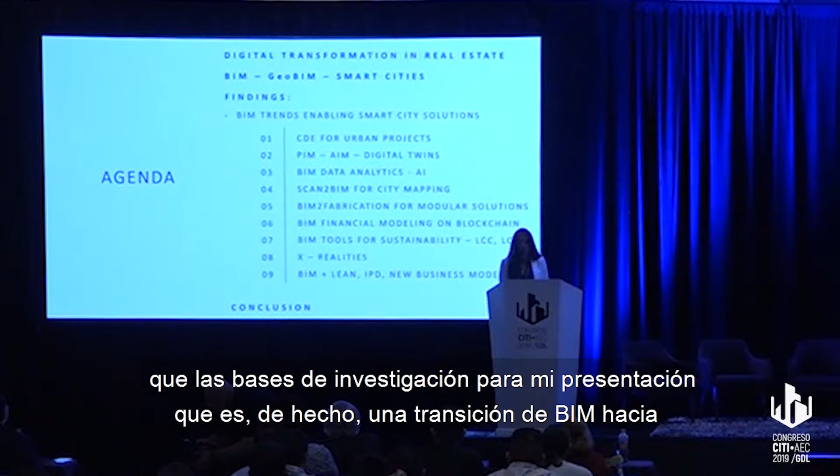After a brief overview of the European and Swiss digital transformation, I will set the research foundations for my presentation, which is the BIM transition to the urban scale through advances in GeoBIM. This is basically the link which connects BIM with GeoBIM towards smart cities. The core of the presentation will be the emerging BIM tools which can extend the use of BIM in an urban context for the development of smart city solutions, from digital twins to blockchain or extended realities.

First, let's look a bit at the digital transformation in real estate, and I'll be glad to tell you how it is now in Switzerland.

The real estate industry is massive in Switzerland, and I'm sure here as well. It accounts for 3,000 billion in the current value of the building stock. However, we work in a very conservative industry, which is actually in last place when it comes to adopting new technologies.

There is a need to innovate to overcome a lot of challenges. It's not that everything is perfect, because there are a lot of inaccurate valuations, cost overruns, and a lack of transparency in many countries, even in a perfect system like Switzerland. There is a need to innovate to overcome these challenges.

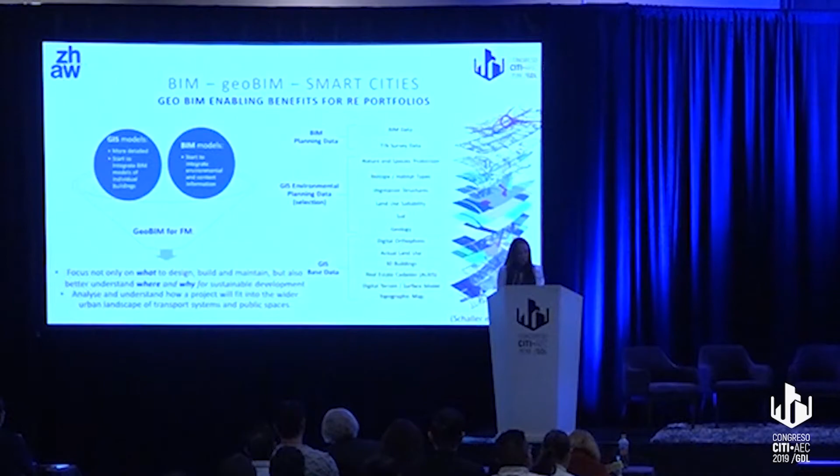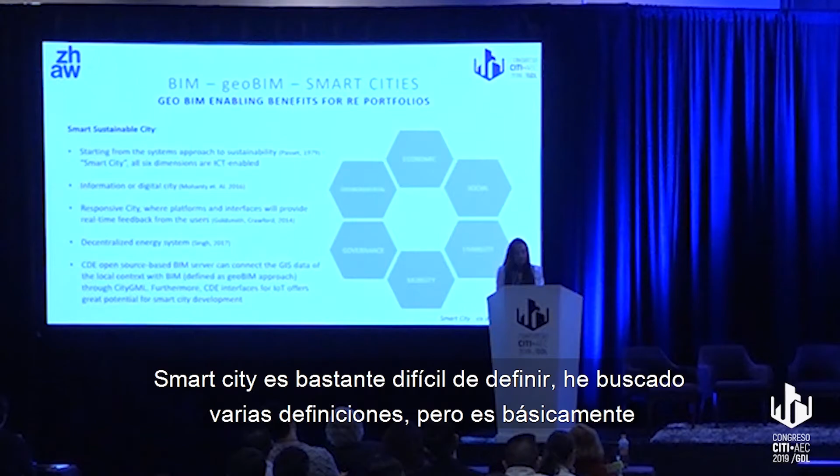Smart city is actually hard to define. I've been looking for several definitions, but it's basically an evolution. Some call it Tel City, Information City, Digital City. But when we consider smart cities, we also take into account sustainability, starting from the first three pillars: economic, social, and environmental. With BIM we can make the transition to more responsive neighborhoods by integrating mobility and environment.

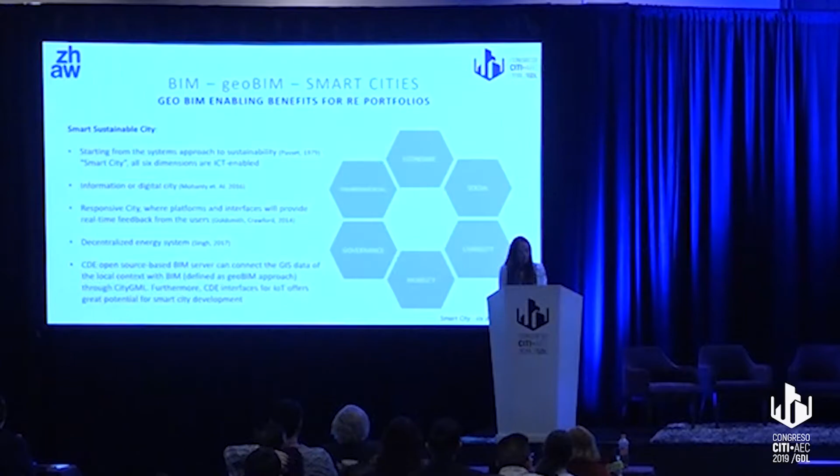Next, I would like to introduce some trends which, in combination with BIM, have potential to really make a difference and capture more value if applied on cities.

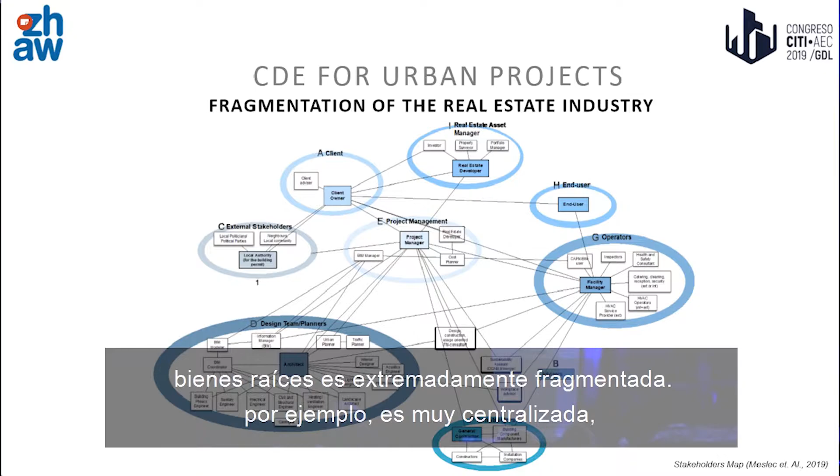First, the common data environment. We have already seen in previous presentations what the future developments are. However, I would like to take a step back and point out that the real estate industry is extremely fragmented. In finance, for example, it's very centralized - we have only a global exchange, a ledger. But in the real estate industry, everyone is working as an expert in their own field. So this is really a challenge.

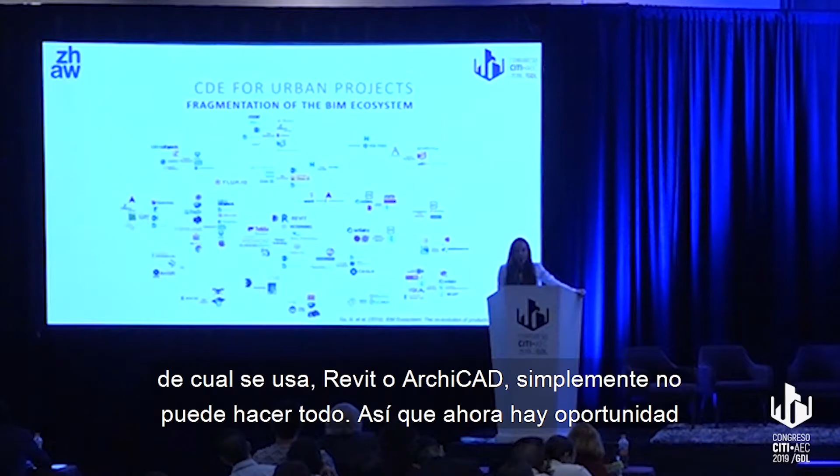As a consequence, there is a very broad offer of BIM solutions. BIM is truly an ecosystem, and there is no single software that can do everything. Regardless of whether we use Revit or Archicad, it simply can't do everything. So there is now a market opportunity to develop integration, especially to connect it with GeoBIM. Here you can see a possible solution.

The common data environment, as defined in the current ISO standards, is actually an open source-based BIM server which can bring together all the different sets of information from different stakeholders. As an industry, we can take benefit from this and avoid miscommunication problems which lead to cost overruns and so forth. It's actually a single source of truth, which collects and manages the alphanumerical data and documents of a project.

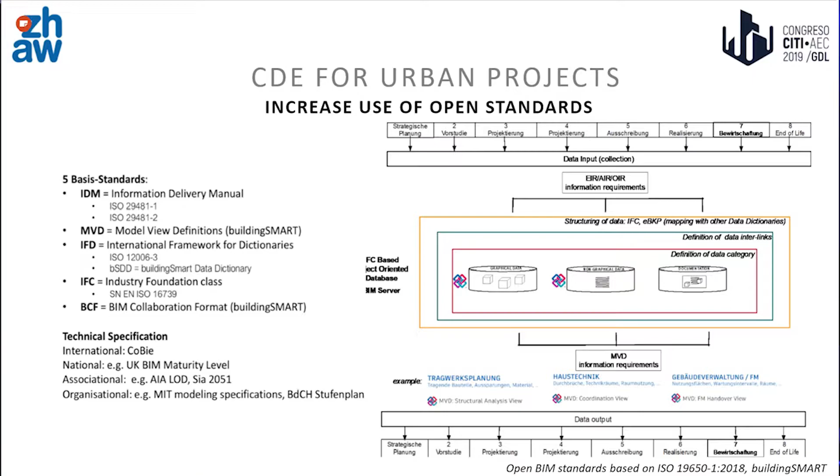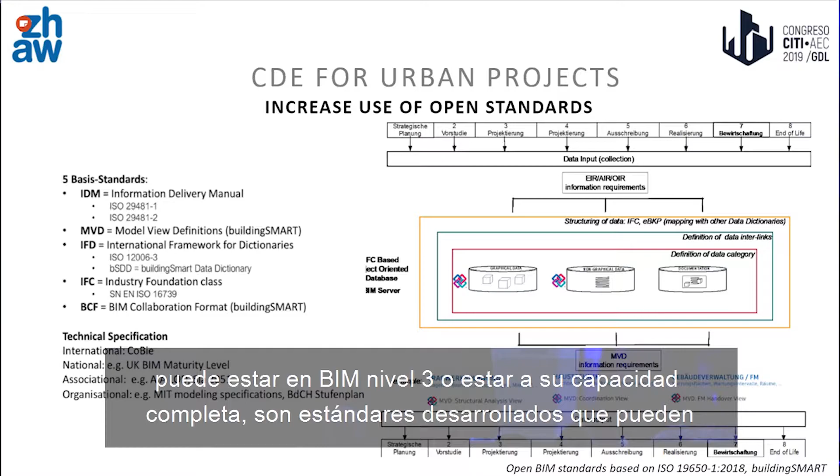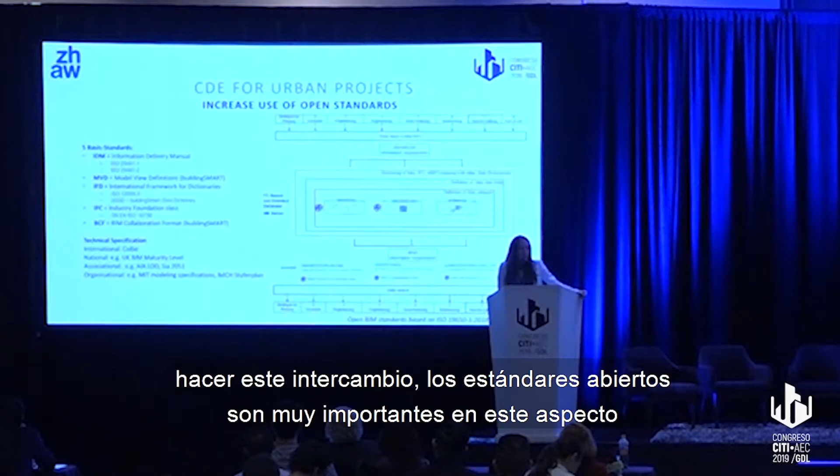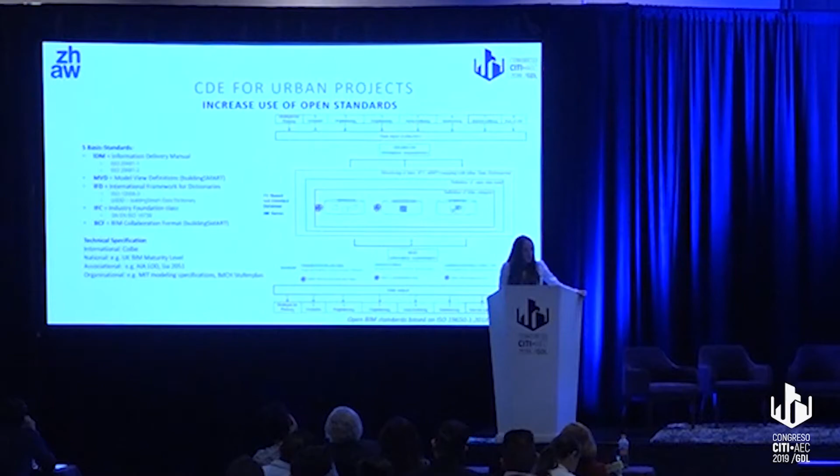In the future, it can be used at its full capacity in level 3 BIM if standards are developed which enable this exchange. So open standards are very important in this respect - not only IFC, but also model view definitions and IFD and so forth.

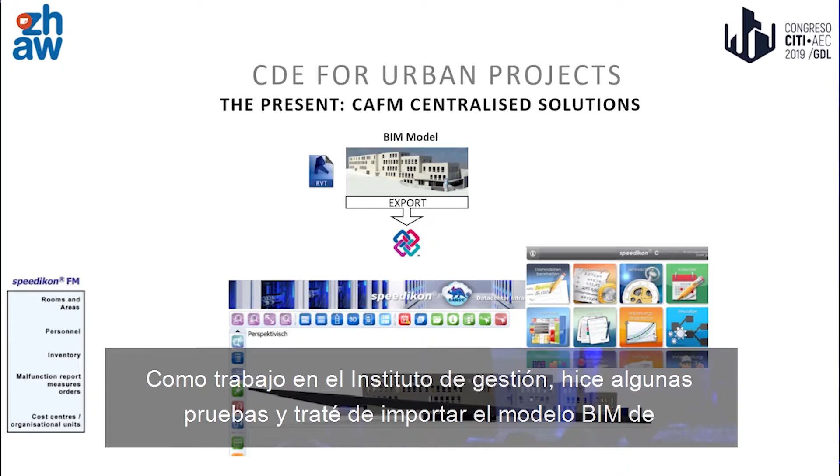Because I'm working at the Institute of Facility Management, I did some tests, and I tried to import the BIM model of our university, which had been created in Revit, into a CAFM software. It was very limiting how I could use it.

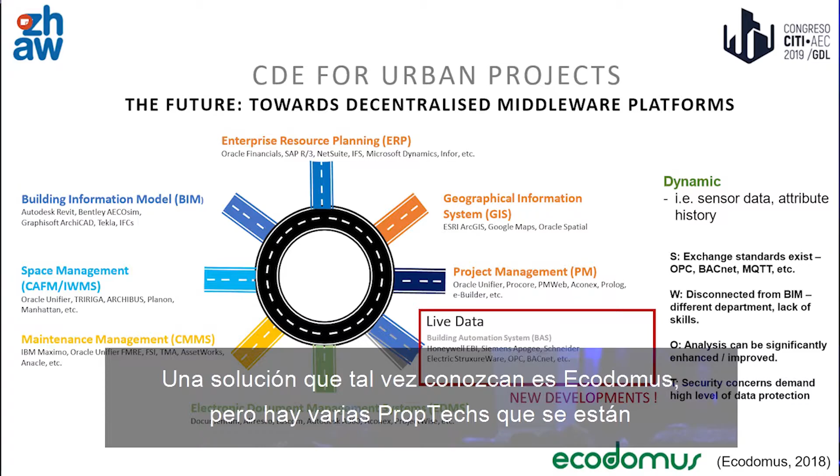But I believe that in the future the model could be on a more decentralized platform, the so-called middleware platforms, which can pull data from different sources. One solution you might know is Ecodomus, but there are several PropTechs developing this. What's new is integrating now IoT data, so live streams of data can also become reality.

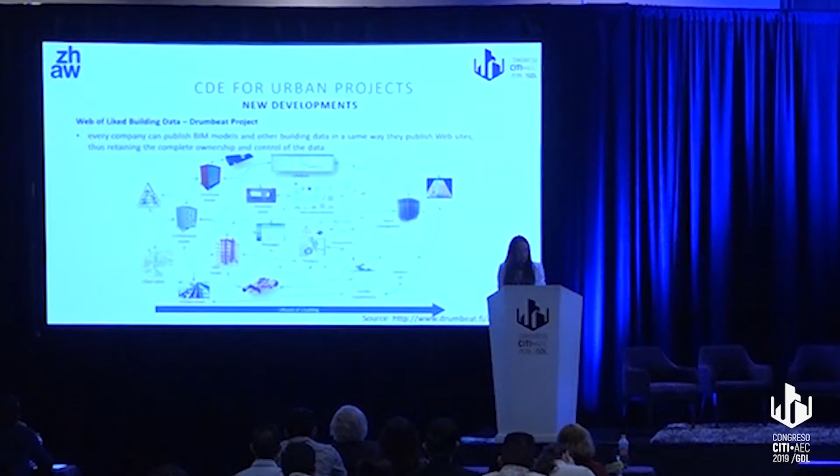And sure, there are more solutions like the web of linked building data, which we have seen in previous presentations, like the Internet of Data, also based on this decentralized concept.

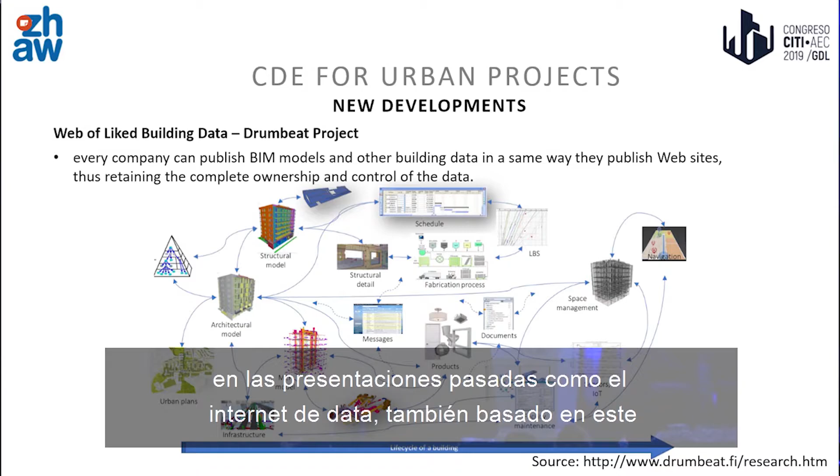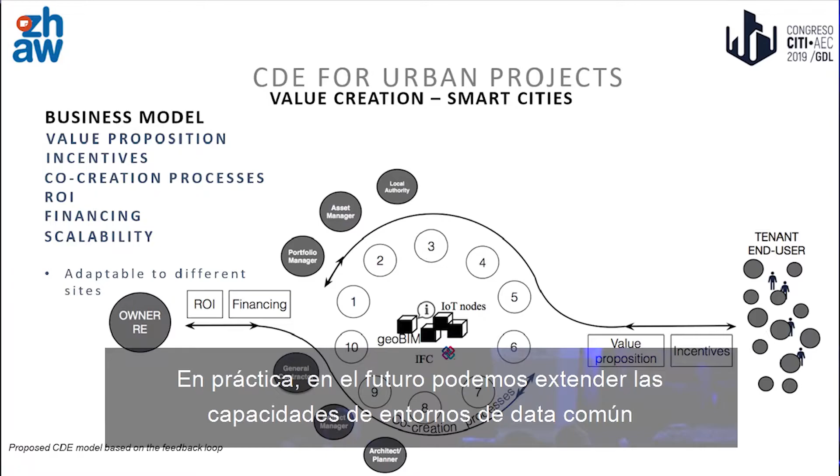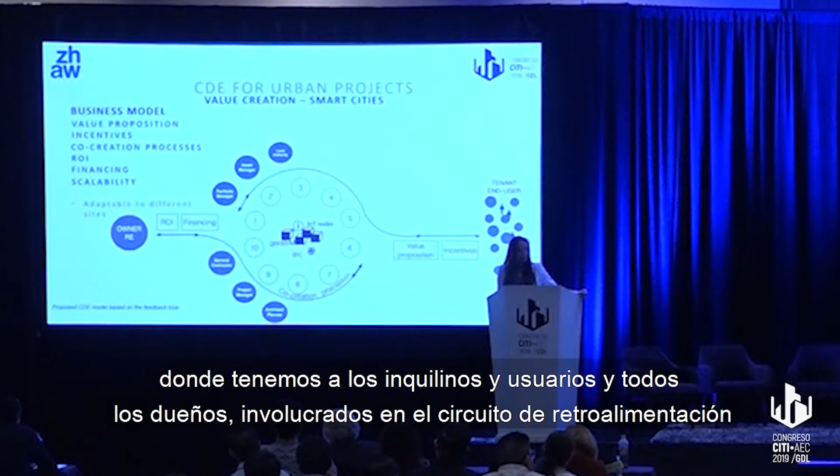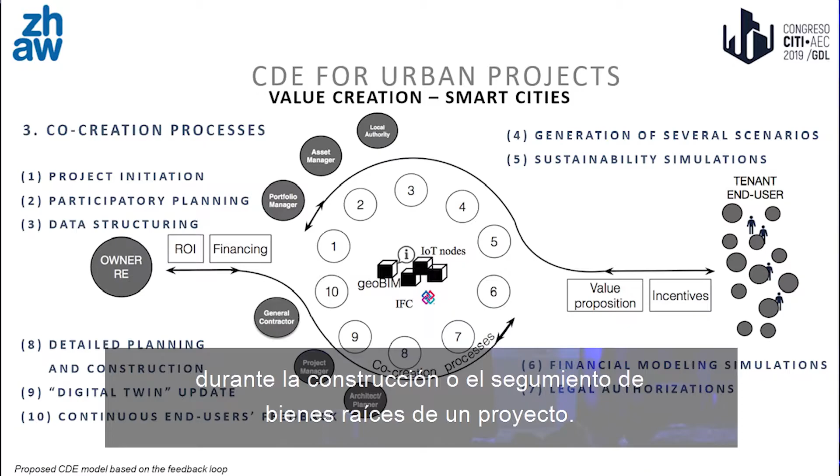In practice, in the future we can extend these capabilities of common data environments to an urban neighborhood. You can see here a model which I've developed this year, where we can have the tenants, users and owners involved in a feedback loop, all connected via a common data environment, which would also enable some co-creation processes during the construction or real estate development of a project.

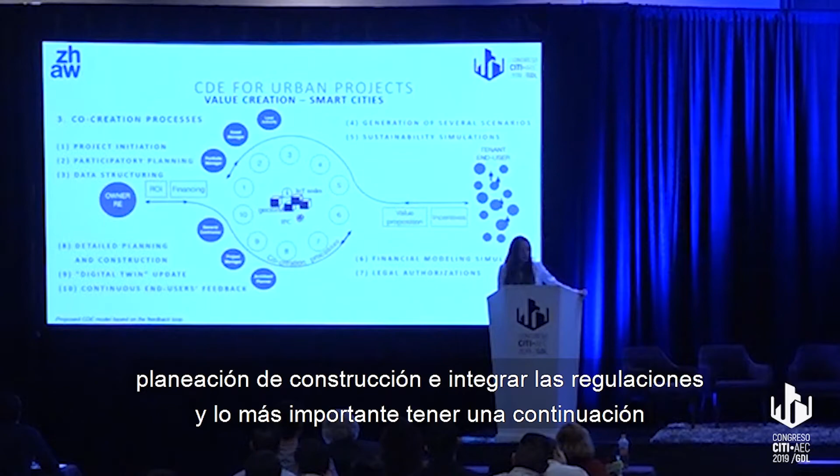The advantages are huge because we can generate several scenarios and receive immediate feedback from tenants and all stakeholders involved. We can also have detailed planning of construction and integrate the laws and regulations, and most importantly, have a continuous end-user feedback loop.

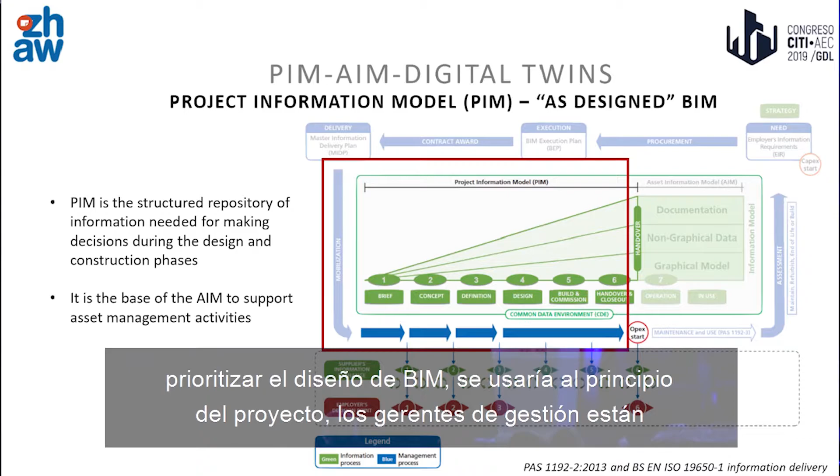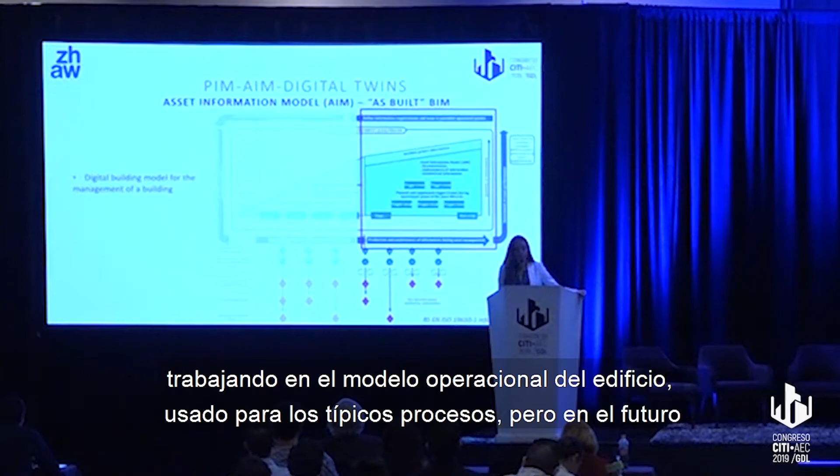Also, it's now possible to have this transition from project information models to asset information models and further on to digital twins. I'll go quickly because you might already know the standards. The project information model we would call design BIM, used at the beginning of a project. Further, the facility managers work on building up the operational model of the building, used for the typical FM processes.

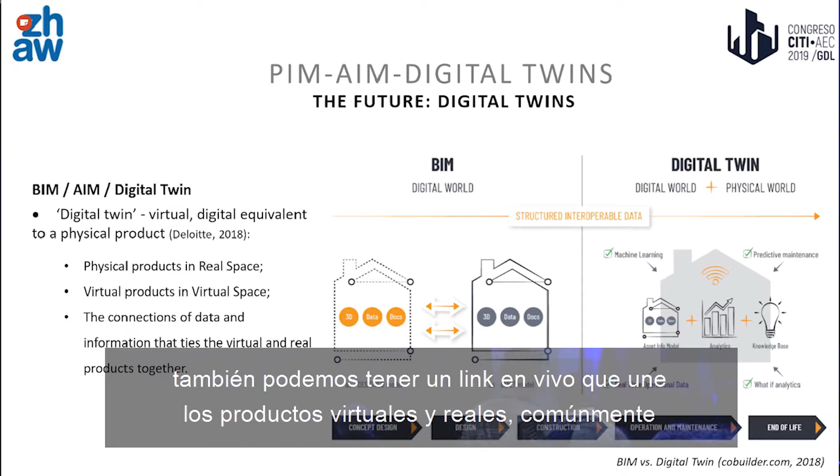But in the future, we could also have a live link which ties the virtual and the real products together, commonly known now as digital twins. Some examples are already on the market developed by Autodesk, like the project Dasher here, where different sensors can be visualized live.

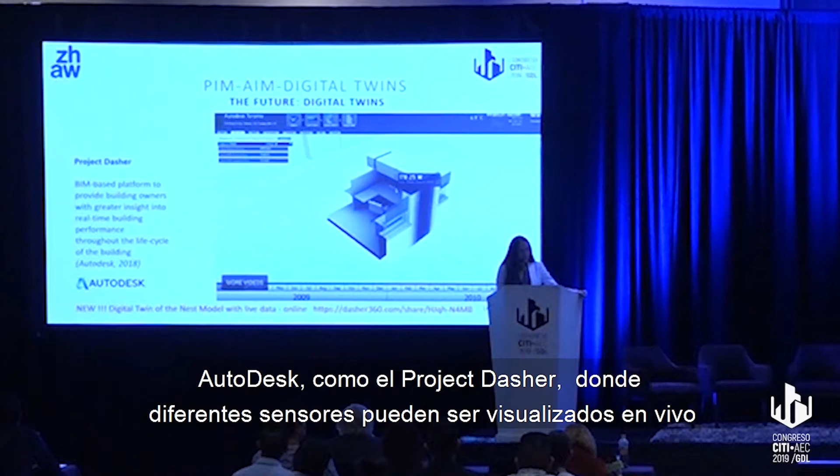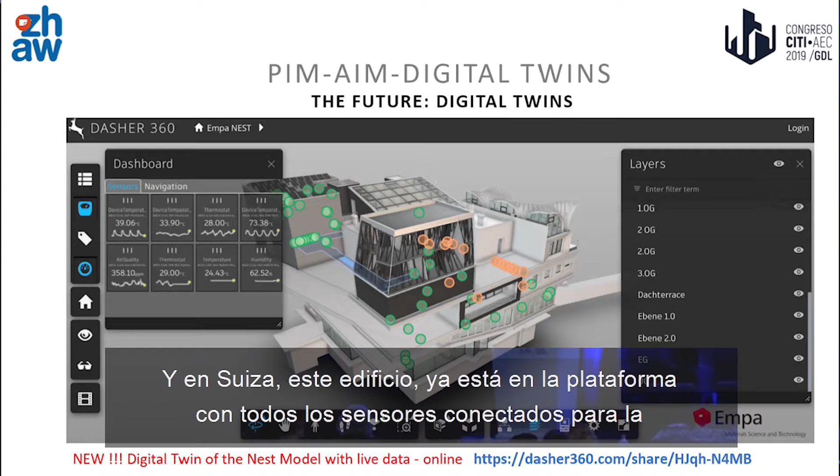In Switzerland, the NEST building is now on this platform with all the sensors connected, only in the web browsers. We can have a look at the live data.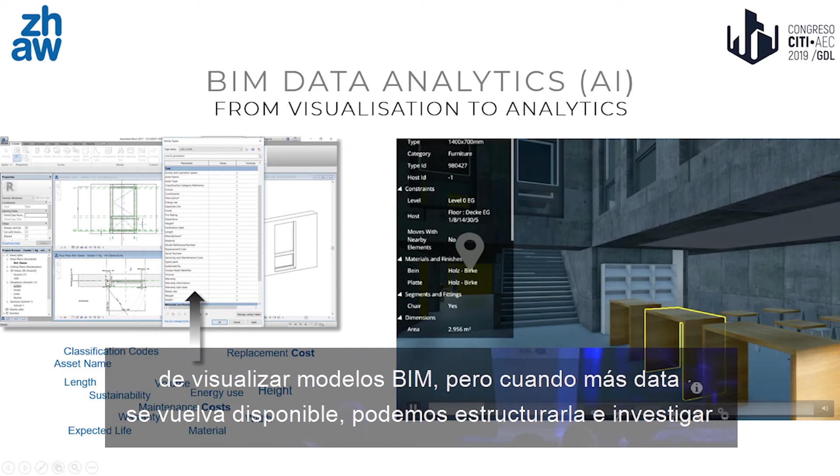There's a lot of potential when it comes to data analytics and artificial intelligence. So far we would only be able to visualize BIM models, but when more data becomes available we can structure it and investigate how we can create information and knowledge. Here is a model developed by Bilal Succar, based on the ancient DIKW model: data, information, knowledge, understanding, and wisdom. So the question is how can we use this data in a good way so we can really make value out of it?

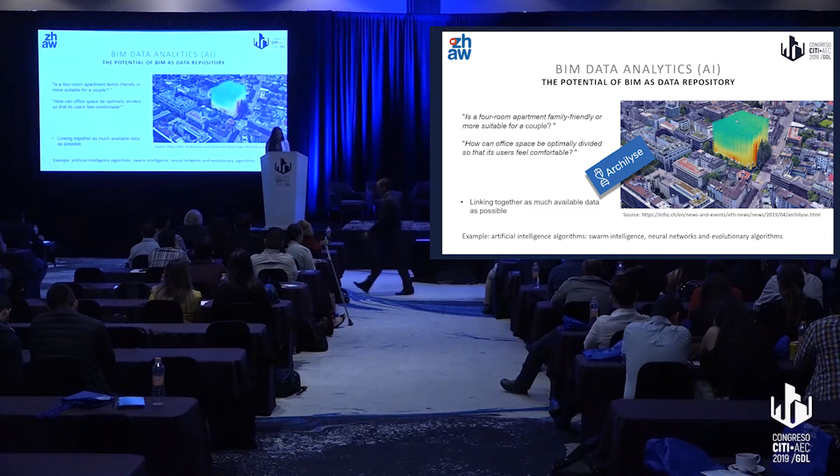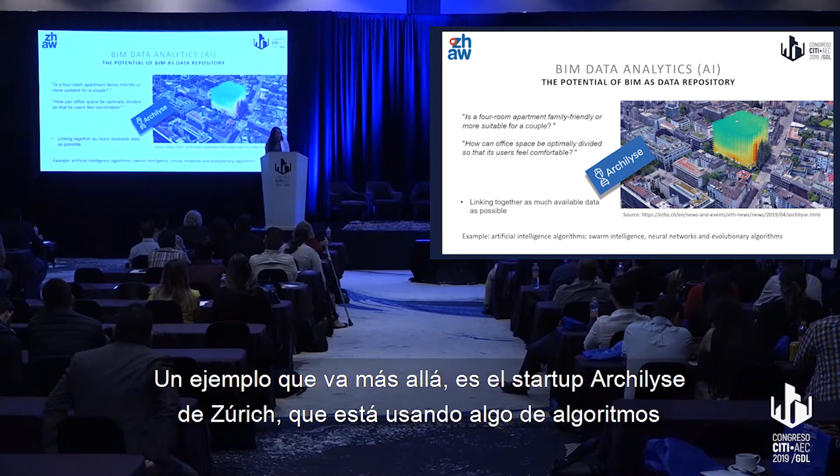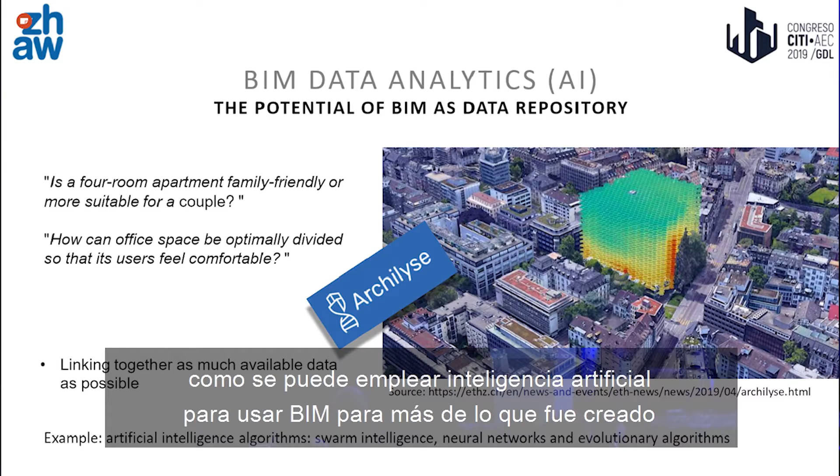One example which goes further is Archilyse, a startup from Zurich, which is using artificial intelligence algorithms. They go a step further from predictive maintenance, looking at how we can use AI to really use BIM for more than it was done traditionally.

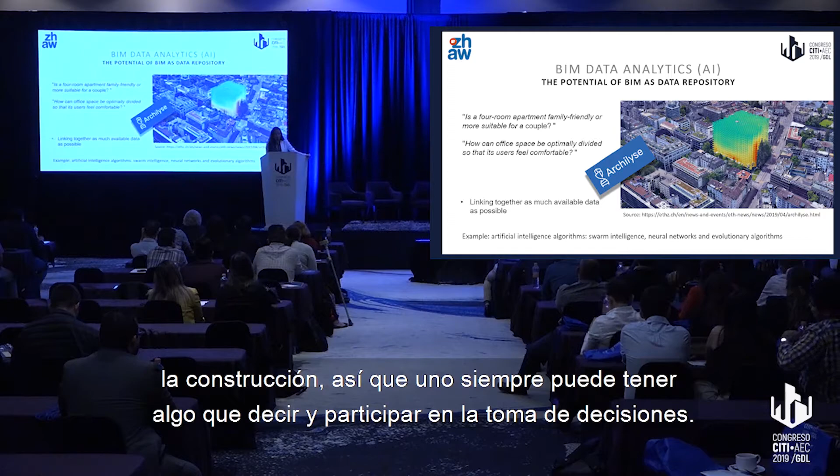So we could answer questions like how an office space can be optimally divided so users feel comfortable, and so forth. Obviously an architect would know the answer for this, but these tools are important also to democratize BIM and the construction industry, so that everyone could have a word to say and participate in decision making.

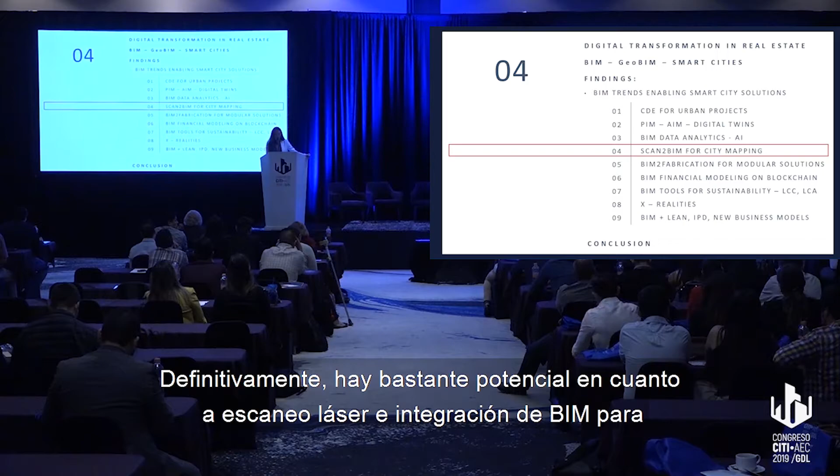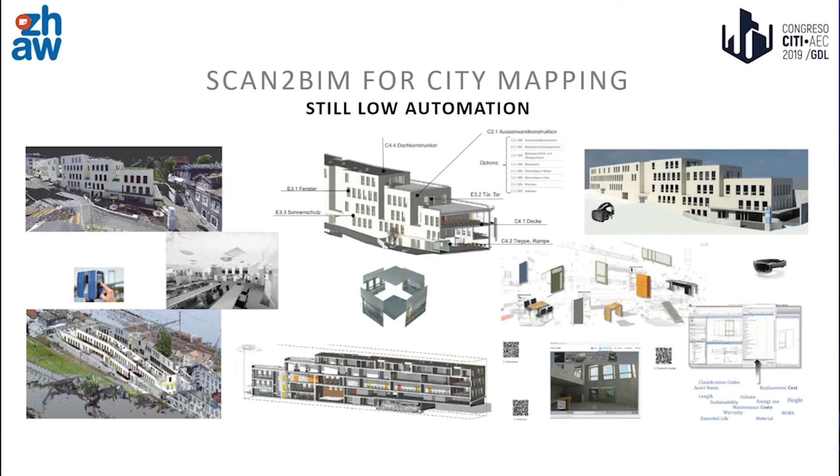There is definitely a lot of potential when it comes to laser scanning and integrating with BIM, especially for city mapping. In this use case I've been working on, I've seen that the process is manual. Even though scan-to-BIM can really increase efficiency over the life cycle, because we capture reality and have live and more accurate data, currently it's difficult to create automatic BIM models, 3D geometry from point clouds.

There was a video, sorry, I see that the videos don't work, but it's fine, we can skip it.

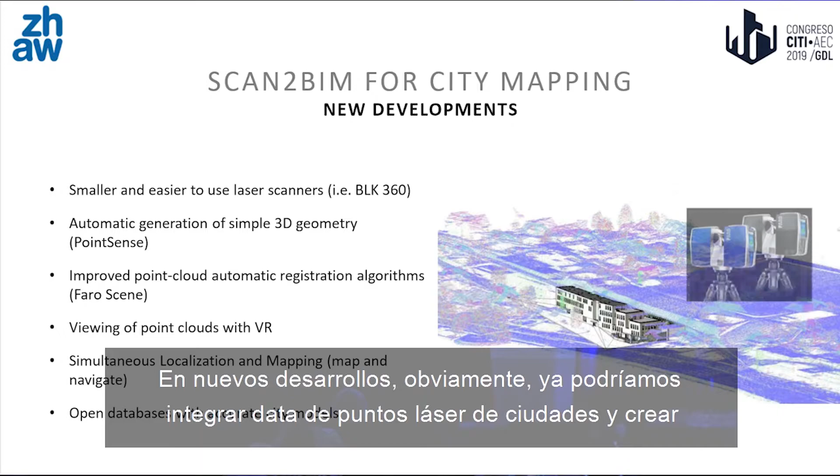New developments mean we could already integrate laser point data of cities and create very accurate open databases with city models, which could actually help us a lot.

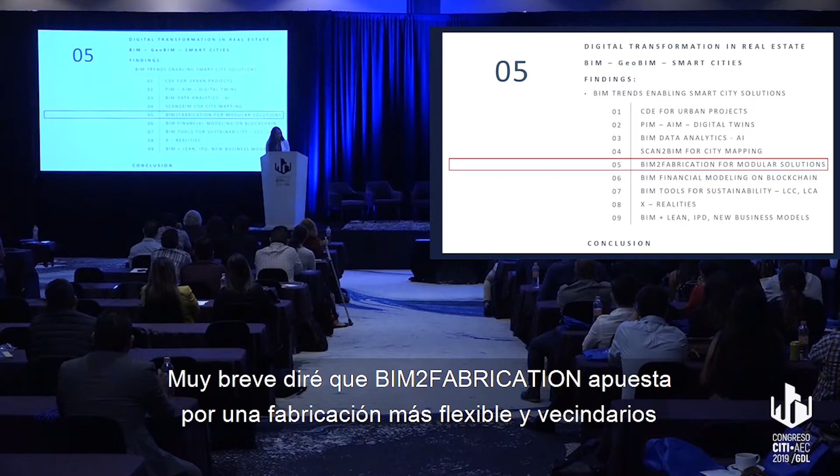Very briefly, I would say that BIM to fabrication for more flexible and modular neighborhoods has definitely potential. This was again a small video, but with a lot of BIM objects from the use cases I've developed. In the future we could use it for fabrication.

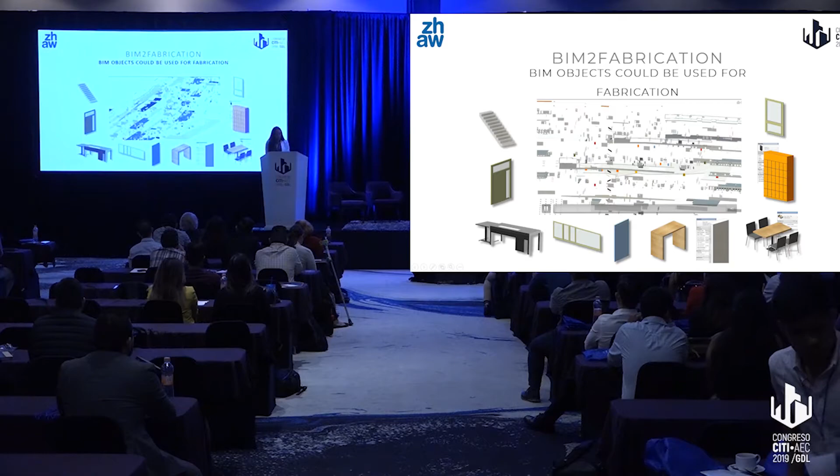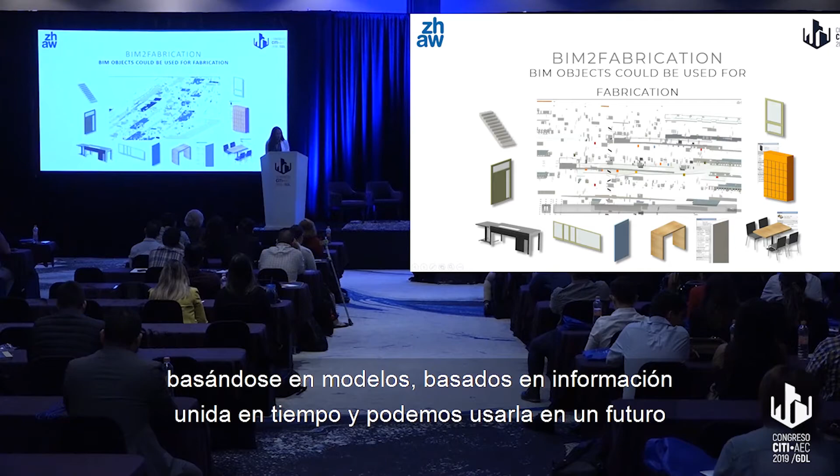So the BIM objects are actually intelligent because they can automatically rebuild themselves based on models and information attached to them. In the future we could use this to create more flexible apartment buildings, which could change together with market demand.

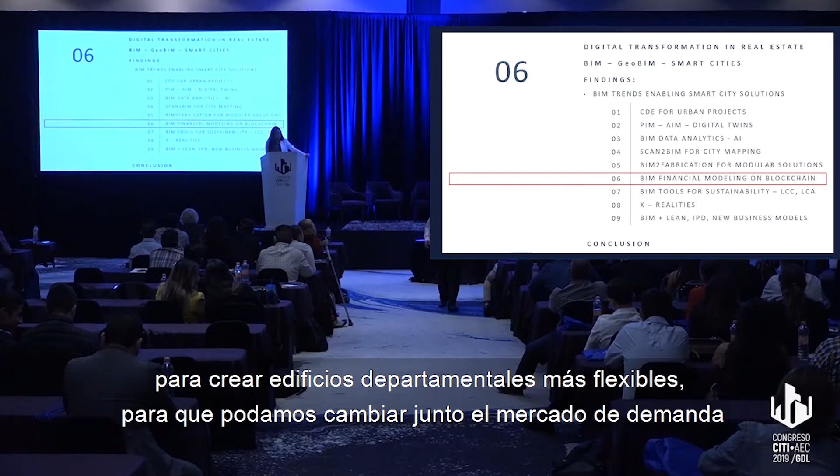At least in Switzerland, blockchain is quite a hype because it is the country with the most favorable regulations for blockchain. In relation to BIM, it can really help with the challenge of trust, because a lot of financial data is not stored in BIM due to trust issues.

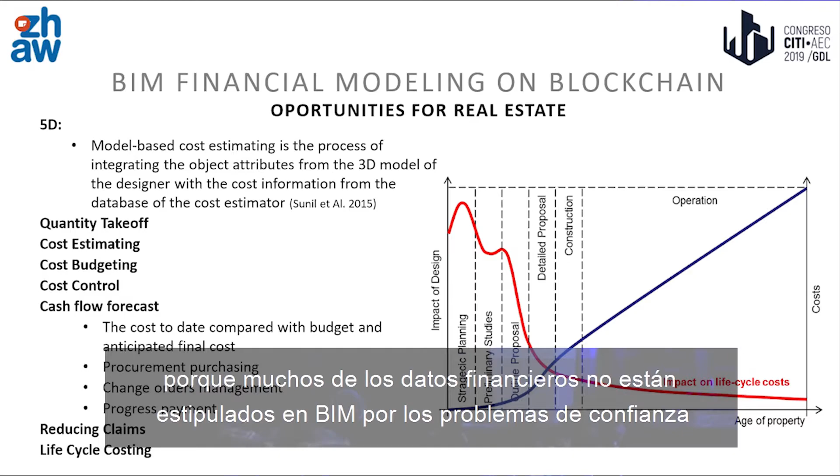If this data is standardized and put on a blockchain, then we can do a lot more. Plus there will not be an intermediary, so the middleman disappears, and transactions would be much faster.

Smart contracts are used quite a lot in facility management, for example. Through these contracts we can basically speed up the payment process, and by connecting them with the property DNA of buildings, use them in transactions and also during operations, delivering more innovative energy efficiency data services.

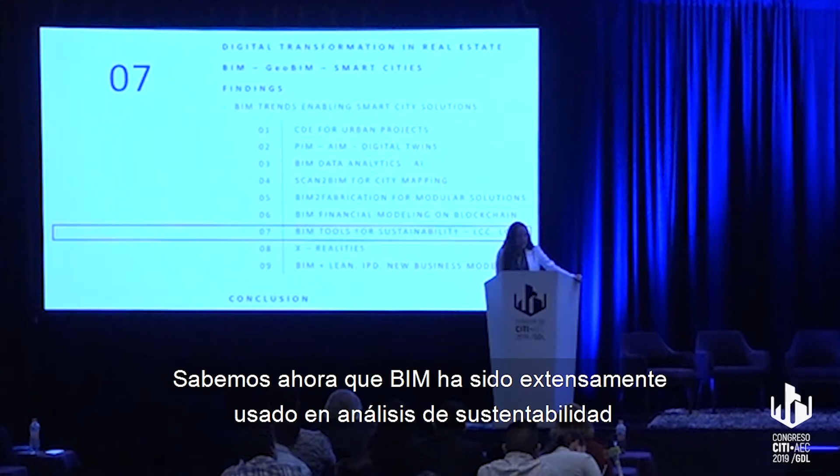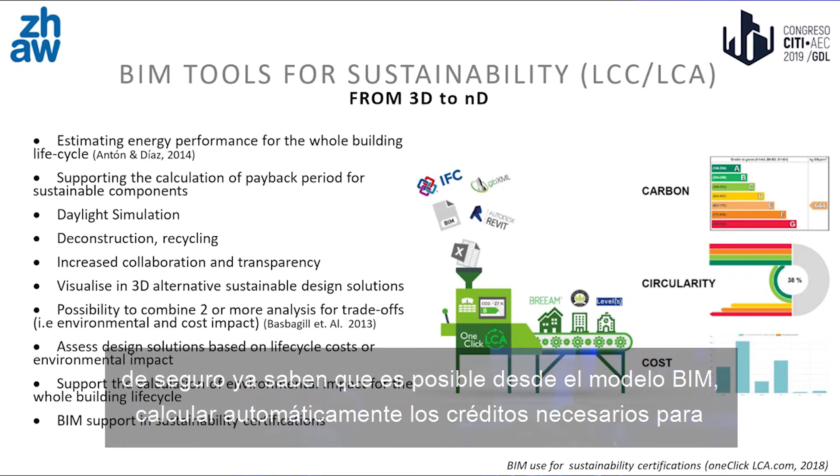We know already that BIM has been extensively used in sustainability analysis. You might know already that it's possible to automatically calculate from the BIM model the credits required for different sustainability certifications, and we can also assess design options based on life cycle costs and so forth.

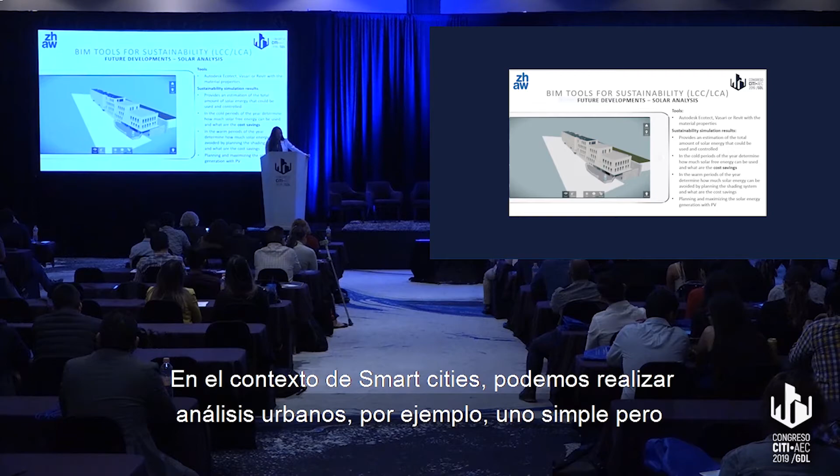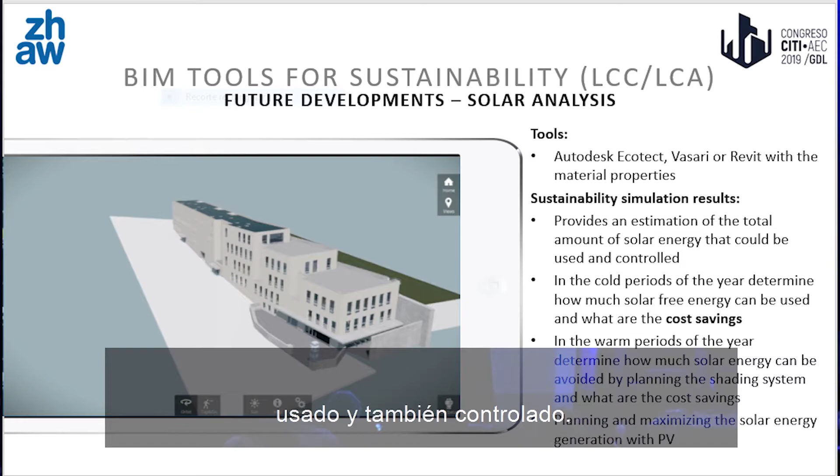In the context of smart cities, we can perform more urban analysis, like, for example, a very simple but very useful solar analysis, where we could provide an estimation of the total amount of solar energy that could be used and also controlled.

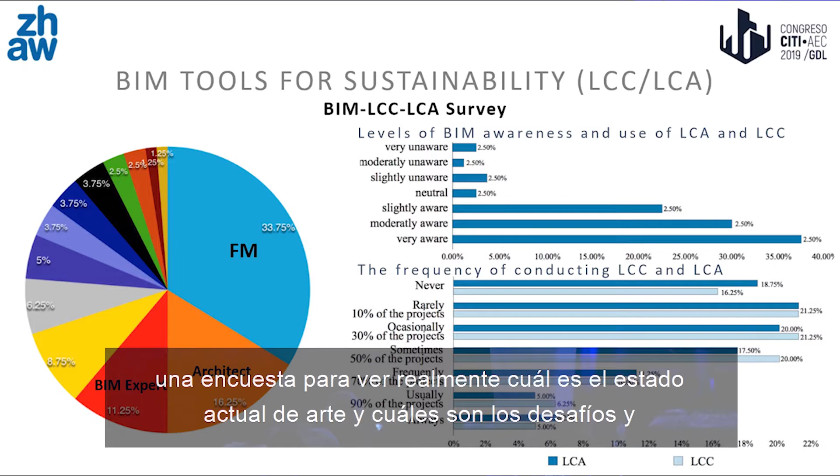Here are just some snapshots from the use case I've been developing, and I've also been conducting a survey to see what is the current state of the art and what are the challenges and opportunities of integrating BIM with life cycle assessment and life cycle costing. I've also been working on an integration model, and some initial steps have been developed here.

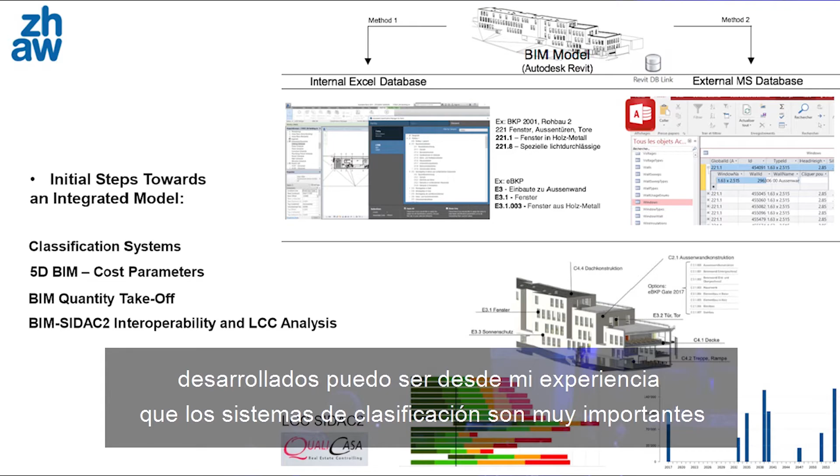I could say from my experience that classification systems are very important for streamlined integration with life cycle costing software tools.

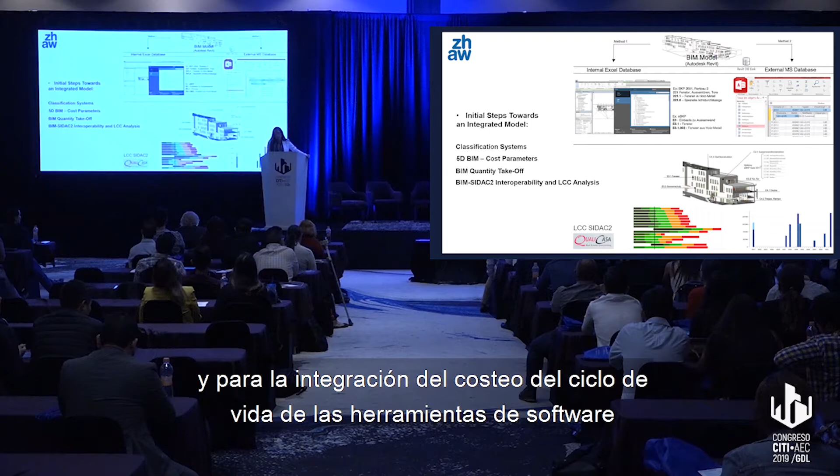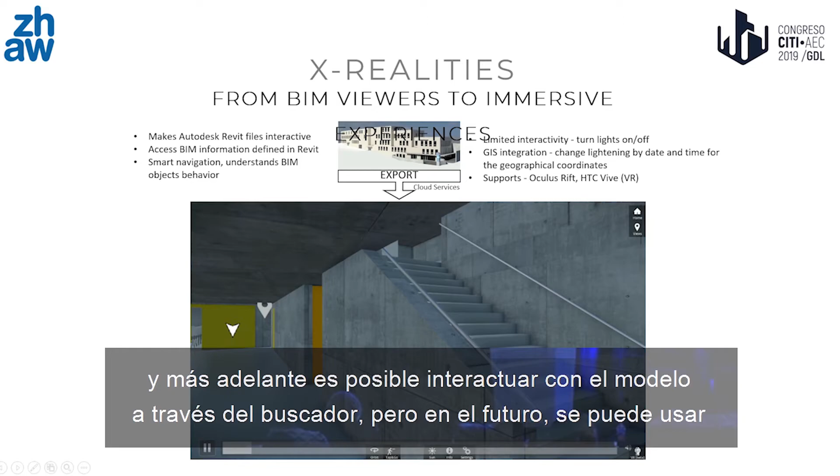I believe that up until now, BIM was used very often to just export 2D drawings, and later on it was also possible to interact with the model in the browser. But in the future, we could really use BIM for immersive experiences.

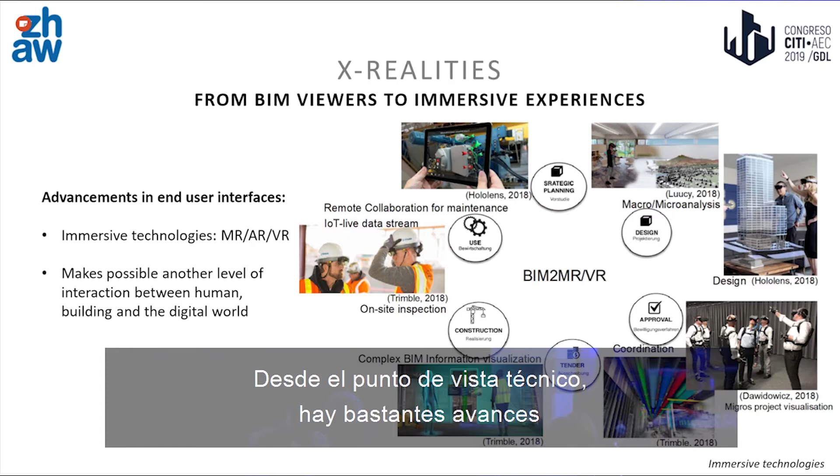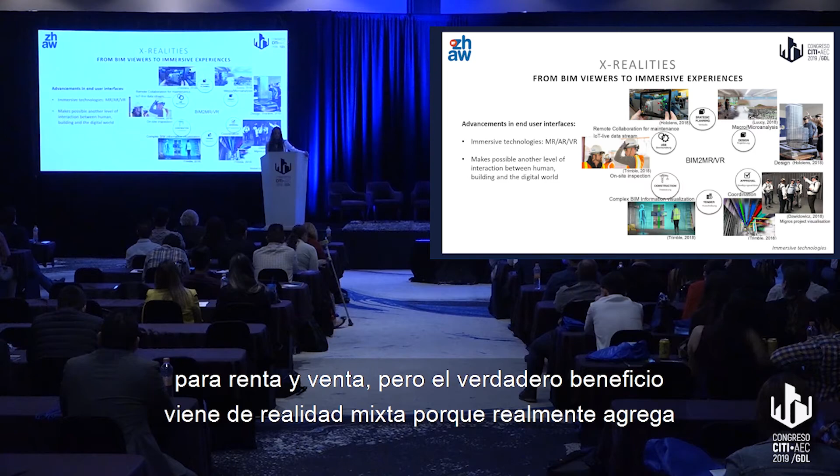From the technical point of view, there are quite some advances. There were some virtual reality BIM-based solutions which were commonly used by real estate investors as marketing tools, virtual tools for renting and sales. However, the real benefit comes from mixed reality, because it actually adds another layer of information to the world.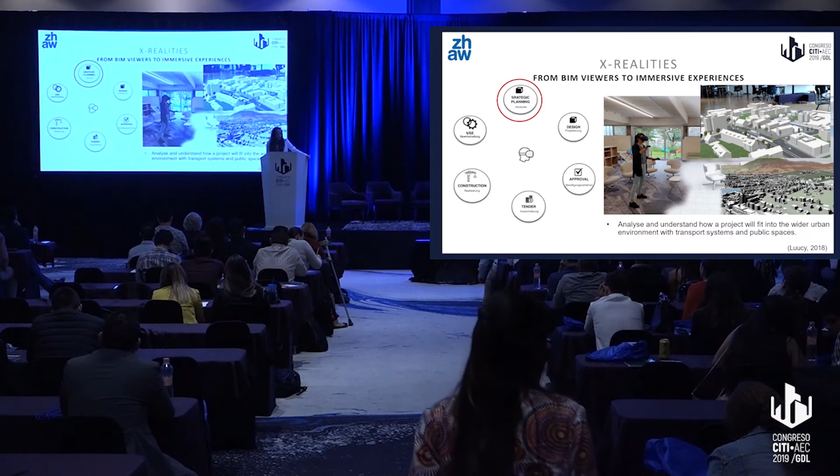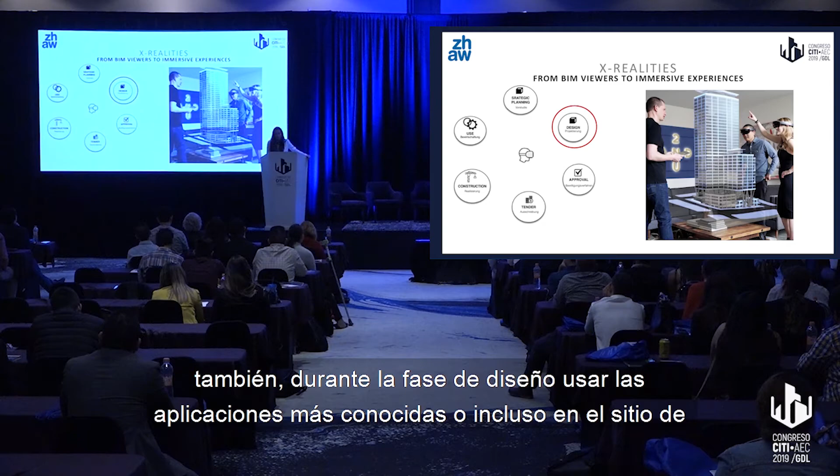We can visualize this information and interact with it in a different way than we used to in a web browser or on 2D plans. So mixed reality can actually make complex data much easier to understand. Very briefly, I could say that we could use it in analyzing and understanding complex site locations, also during the design phase, probably the most known applications, or even on the construction site, to visualize one-to-one the equipment for clash detections.

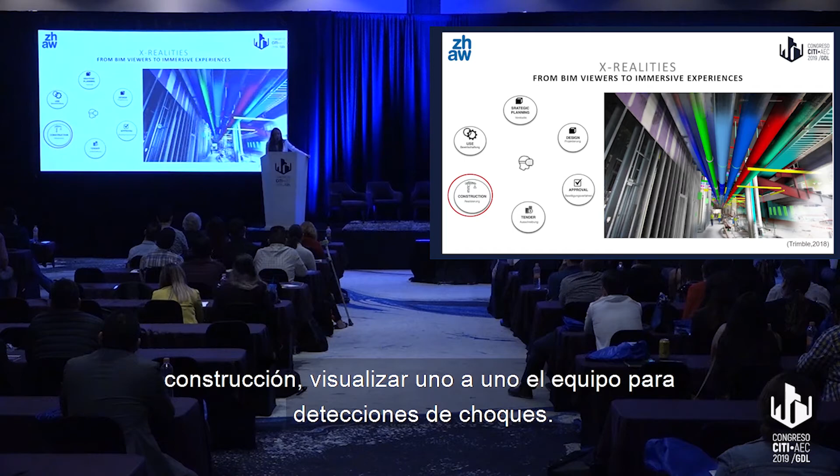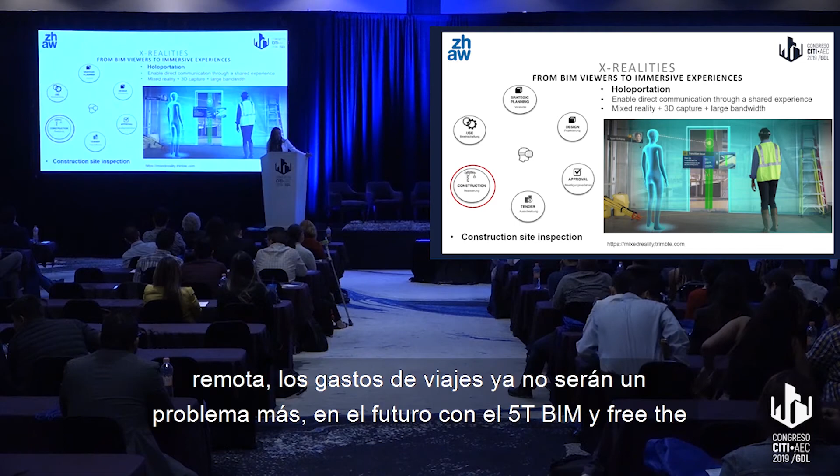As you can also try outside, because I've seen the headset from Trimble. A lot of problems can be overcome because obviously we could also use it for remote collaboration. Traveling expenses are then not more a problem, and in the future with 5G and 3D capture, we could even have the avatar transported, which can enable this direct communication through a shared experience, and we can really say we are all in a project team looking at the same problem.

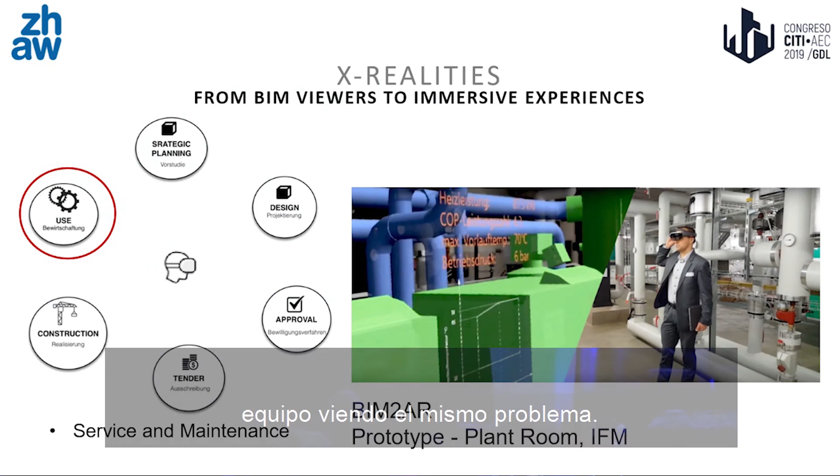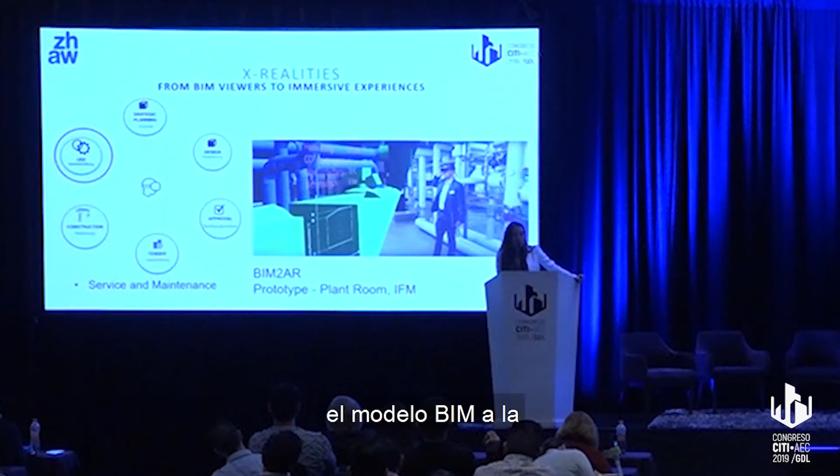Here you can see the use cases I've been working on in our building, where I've been connecting the BIM model to an IoT platform, and we had this live streaming of energy data.

There's a small video that for some reason I see is not activated.

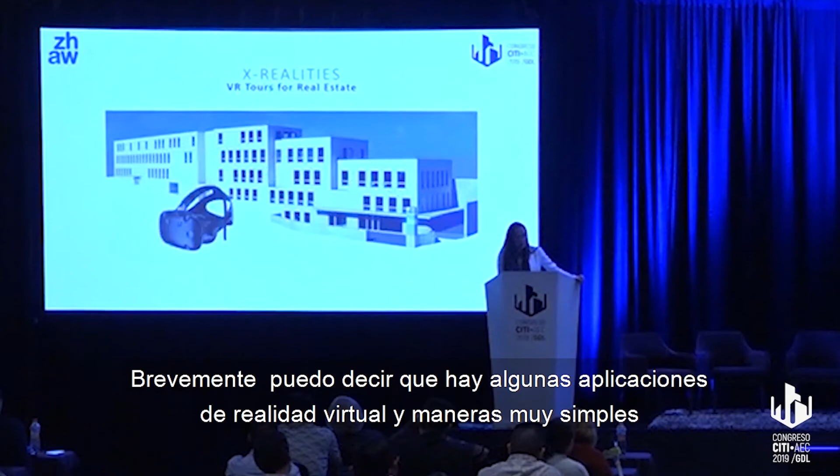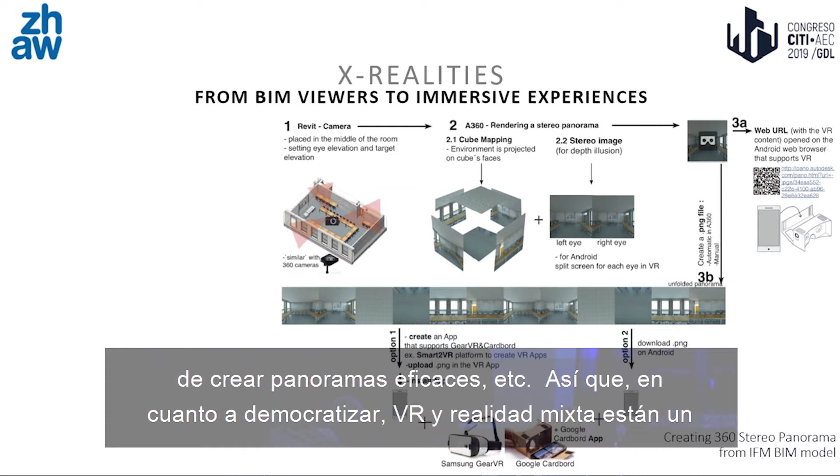Just briefly, I could say that there are a few virtual reality applications and very simple ways to create 360 panoramas and so forth. So when it comes to democratizing VR and mixed reality, we are now a step further.

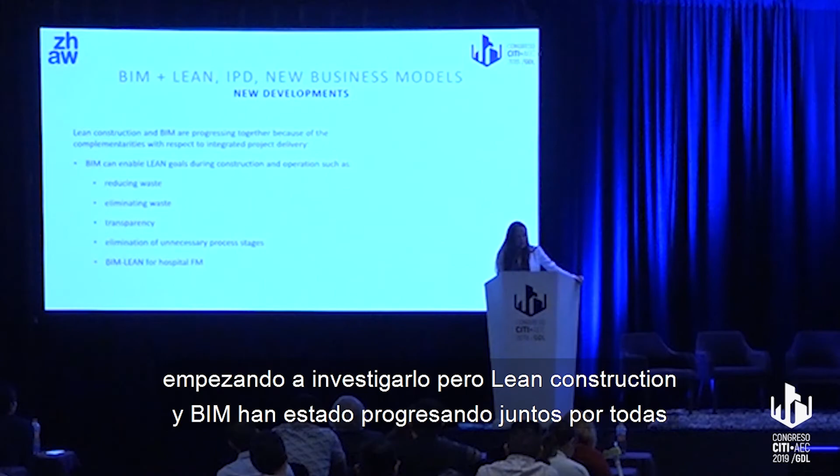I would like to end with BIM and lean developments. I'm not going into detail, as we have just been starting researching it, but lean construction and BIM are obviously progressing together because of all these complementarities.

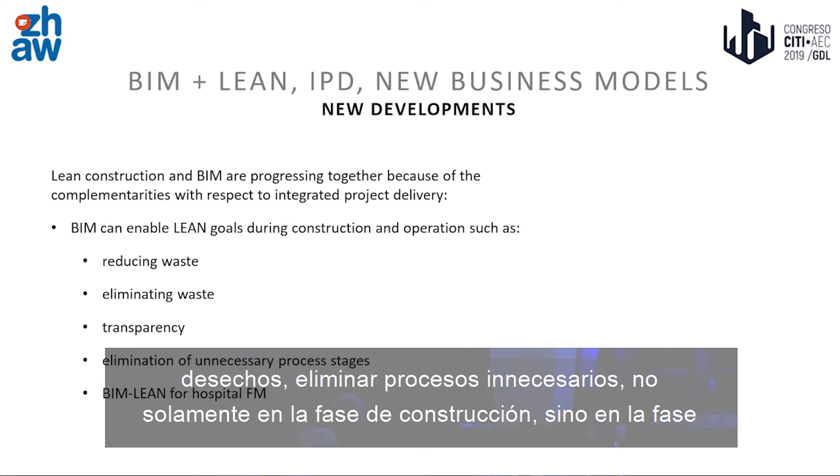With respect to integrated project delivery, we can really reduce waste, eliminate unnecessary processes, not only in the construction phase, but also during the operational phase of a building.

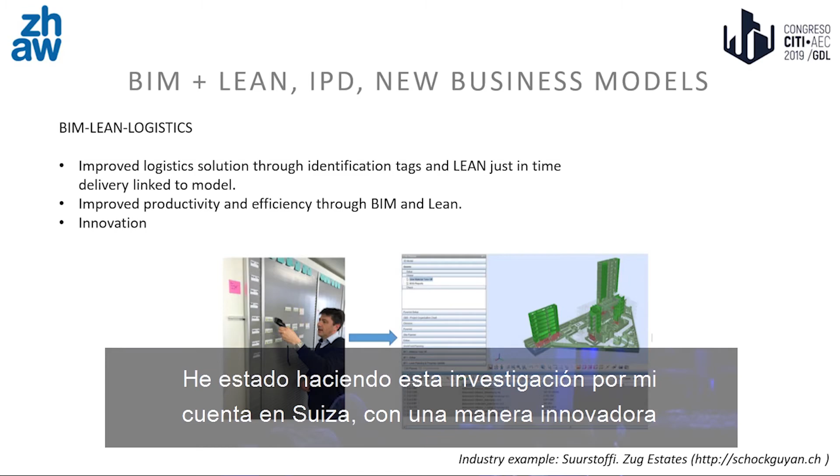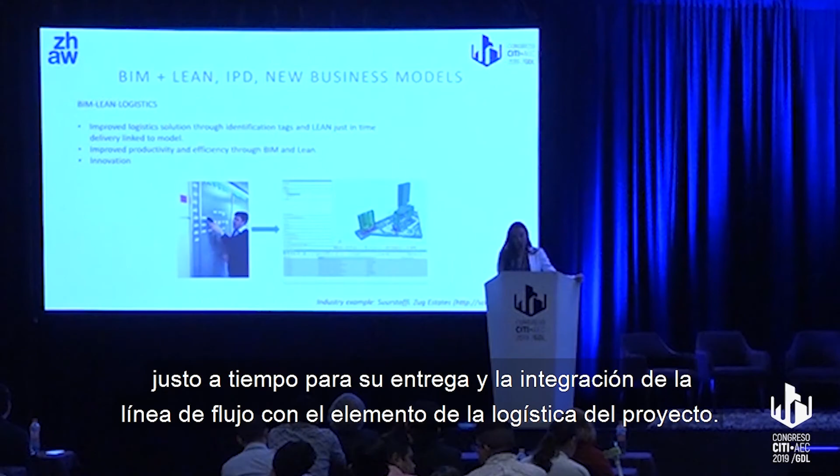This is a case study I've been researching myself in Switzerland, which had a very innovative BIM lean logistics integration, and the building has been finished in a record time because of the just-in-time delivery and the streamlined integration with the logistic companies in the project development.

I would like to conclude with a trend and benefit enablers map, because yes, we have all these gadgets, and it's possible to do so much with these new technologies integrated with BIM. But the question is, in fact, how can we use it in our organization? How can we capture the value from all these technologies?

So as you can see, there's a two-way approach. Inside our organization, we would need to define clearly our main objectives, either reducing operational costs, increasing sustainability, or so forth. And from the other side, map and capture these technologies, classify them into common enablers, benefit enablers, and niche market enablers depending on our needs.

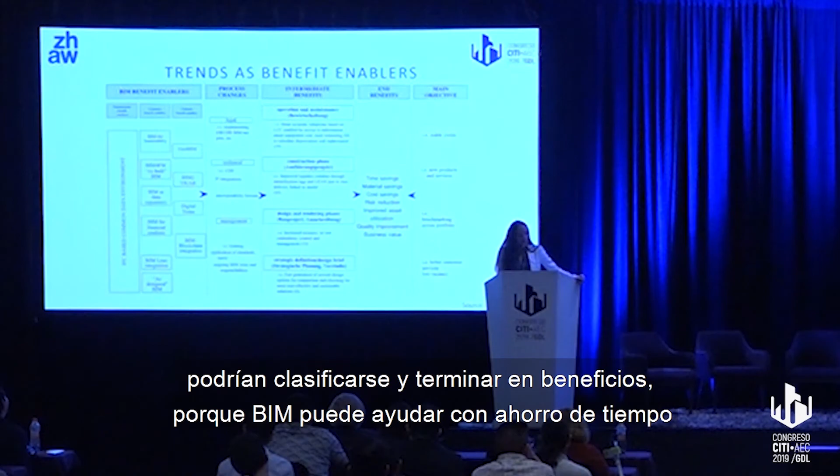Then obviously create a direct link to what processes need to be changed, and then start to map the intermediate benefits, which could be then categorized into end benefits. Because we always read, yes, BIM could help with time saving and so on, but it's very hard to understand what are all the interconnections which lie behind.

Yes, I believe that we definitely don't need to create new software tools, but really work on integrating the existing tools. And we can, in the future, work on projects which can be shaped by this extra knowledge we bring into the project by integrating all the stakeholders, not only at building scale, but also at the neighborhood level.

I could say that there are a lot of innovative BIM solutions which can overcome the lack of data exchanges, data governance questions, trust, and it's only up to us to use them and to develop use cases which can consolidate best practices in real estate to contribute to a common digital understanding of BIM benefits. And in this respect, this conference is also helping a lot, I believe.